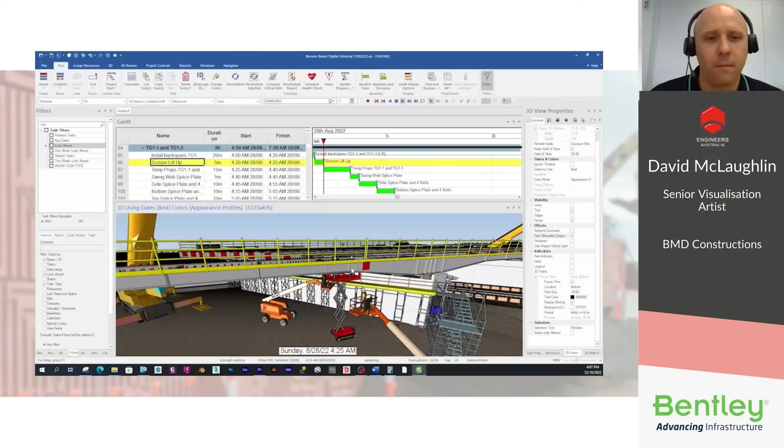So we're installing the main spans here, counterweights, and then we're installing the back spans as well. So, sorry, it's all sped up. Also, I'll send a link at the end for the full video through Vimeo.

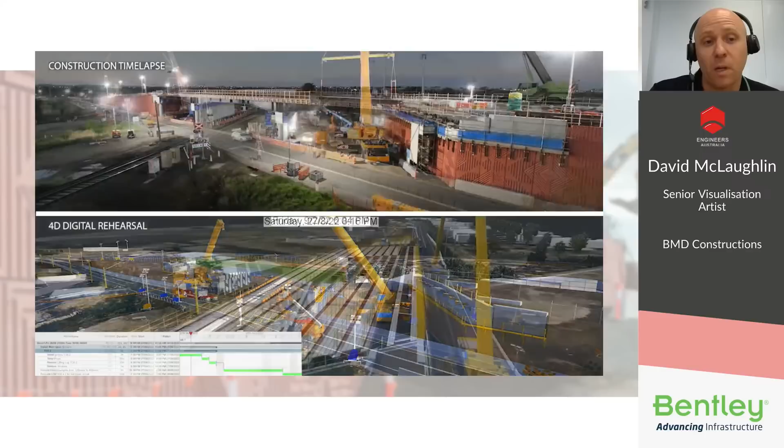What I like about this as well is through the 4D digital rehearsal we did in Synchro 4D, I was able to create a comparison between the 4D digital rehearsal and the actual construction. So I was able to get a time lapse from Glen Heston Photography, and they did a great job with that. They gave me the frame rate for each sequence of photographs, and I was able to match that in Synchro 4D and then create a comparison. I was quite surprised at how close, how exact we were with the 4D digital rehearsal compared to the actual construction.

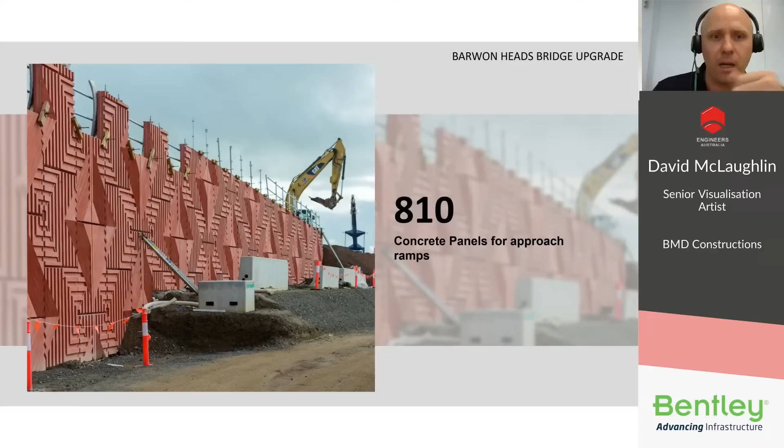So just to recap with the Barwon Heads Bridge upgrade, I'll show some of these images just to give you a sense of scope and scale of the project. We did 810 concrete panels for the approach ramps with this particular design. We built the abutments, the columns, and the blade walls to support the bridge.

It was about 750 ton total of steel beams ranging from 27 to 55 meters long. We transported those from Corio to Marshall, about a half an hour drive. Yeah, about 30 minutes in a car, so a little bit longer with a big transport on a truck.

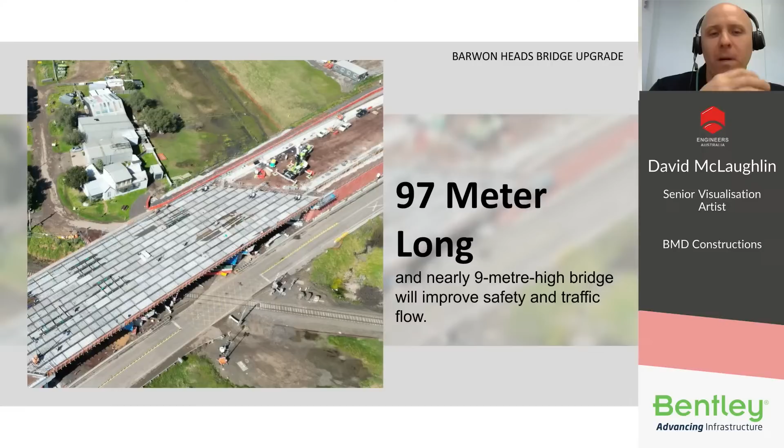And Clint, you can cut me off anytime and jump in if you want. You're doing very well, thank you. So all up, the bridge was about 97 meters long and nearly 9 meters high. This will improve the safety and the traffic flow in that area.

Okay, so I just wanted to do a bit of a time scale of how we implemented the 4D digital rehearsal and then how we presented it to the project team on site. And then we're able to do videos and show clients and major stakeholders at the end of it, before the bridge install in August and September.

So Peter Anusas, who was our general manager in Victoria, Southern region at the time, had a lot of experience with digital rehearsals in the United Kingdom before through previous companies. He came to me with this project. I thought it was a great project to use Synchro 4D and utilize not just what I've been doing, which is 3D visualizations, but adding that 4D element with the schedule and the program.

So all the 3D models are linked to that 4D schedule in Synchro 4D, and then presented through a sequence of 15-minute activities. So it wasn't just hour-long activities, we actually went down to the 15-minute activities.

So that was the beginning of June. At that time, the abutment and approach ramps were ongoing. I would say it's probably 80% complete, I think, Clint. That's correct, at that time. Yeah, that's about right, it was about 80% complete at that stage.

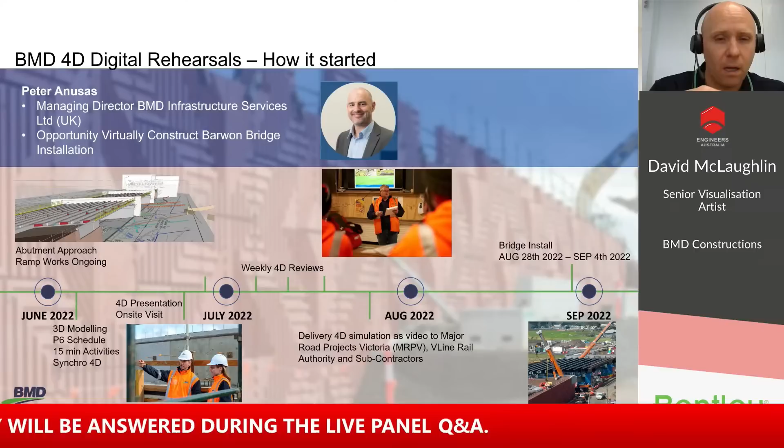There's a bit of a gap there between August and September. I guess the planning phase was done. What happened in that month, Clint?

A lot of consultation, taking what we'd created as our digital rehearsal right down to local fire brigade and ambulance emergency services on how they could actually access the site, explaining what the site could look like at different phases. If they were required, how they would get an ambulance to the site, how we would be preparing stretchers if someone needed to be evacuated. It allowed us to communicate with a high degree of accuracy what it would actually look like, because technical drawings are sometimes difficult to communicate to people who might not be in the infrastructure and engineering space.

I'll move on since we've only got a limited amount of time. We'll discuss some of the 4D challenges we had.

As I show some of these images, we'll go into the methodology, especially the splice plates. On the main spans we were provided with 2D drawings for splice plates. They were attached to the main spans, then swung into place and bolted to the back spans, the smaller girders. My challenge was I was given 2D hand-drawn plans and had to put them into 3D.

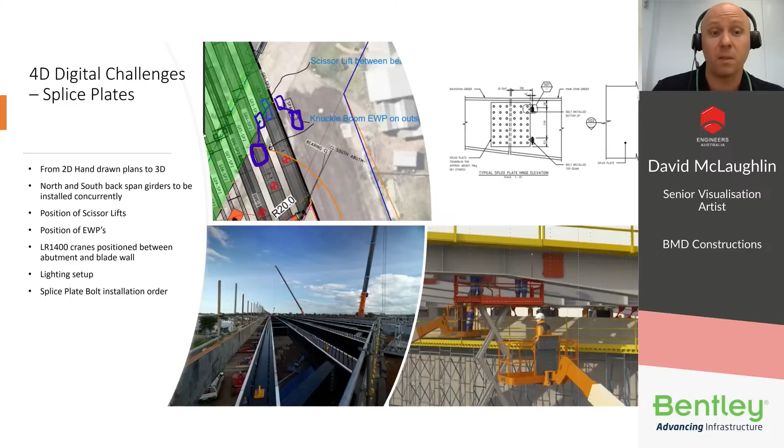We also had two LR 1400 cranes positioned between the abutment and the blade wall, so I had to make sure those positions were correct. The lighting setup was for night work, so we had to make sure the lighting was in the right spot. Then we went through the methodology of the actual splice plate being bolted and the installation order.

So I've prepared a video for this. I think I'll just play this part of it.

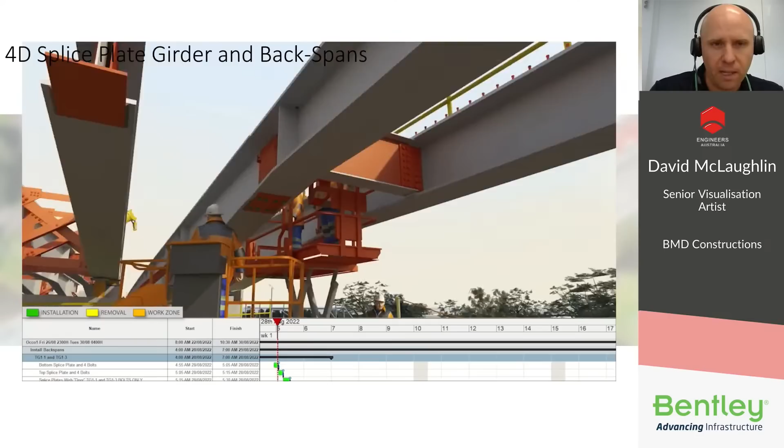These are the two back spans getting installed. You can see the swinging of the splice plate and the attachment of just four bolts, not all the bolts, then the top plate and bottom plate getting installed. I can't go back on the video, unfortunately, but you could see I've also put a landing plate onto the main girders. When the back span comes down, it gets placed onto that landing plate. The model doesn't really show it well, it's just repeating there, but there's a bit of a weld around that landing plate as well.

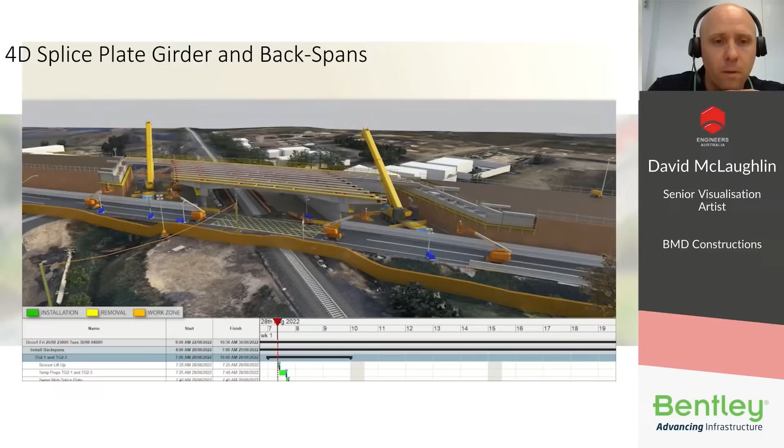So is that correct, Clint? Yeah, 100%. And the detail that we could go into gave us certainty around timing.

Literally timing down to the 15 minutes, but we also modeled it and could talk through with the fitters if they thought that was realistic. It also allowed us to communicate the sequence that the bolting had to be done, and the installation of the plates, because some of the plates we found out could clash and you wouldn't be able to tighten them if you put them in a different order.

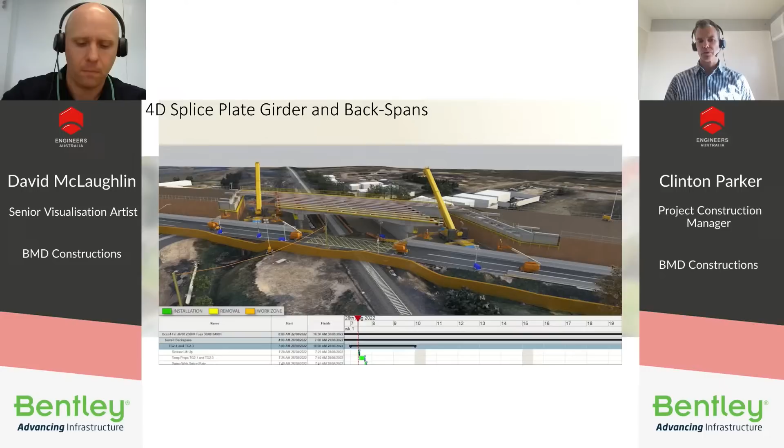So that's the sort of thing we would have not been able to do without these rehearsals. So I'll just play that as well.

Okay, so another issue was the concrete transfloors. Well, it wasn't really an issue, it was something that you guys had developed. You'd never developed this before, like handrails on the concrete transfloors.

We had a quite a good idea. It's probably not necessarily an innovation or something fully new, but we hadn't used it in this application.

So it worked really well in someone's head, and we could get some shop drawings drawn up, but we couldn't fully see how the workflow would work, and we didn't want to leave it to the night of the race because it's very hard to troubleshoot on the fly. So that's what the 4D animations allowed us to do - we were able to model it and then see if it would work and tweak it, which was massively useful in our planning process.

Yeah, that's right. So I've also prepared another video for this, just to show the transfloors being installed.

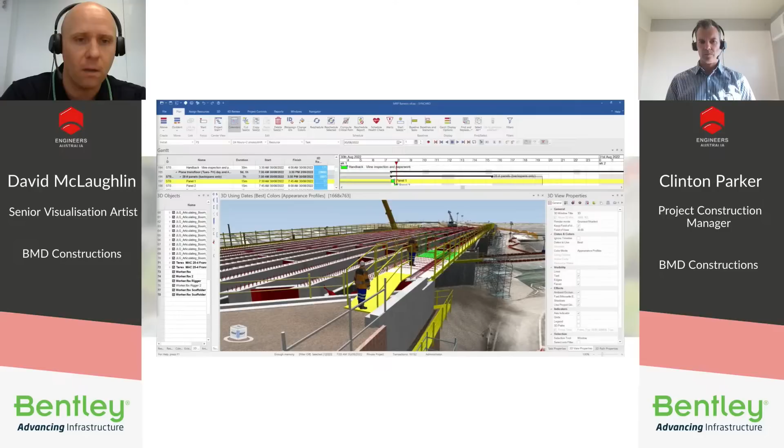Also, we discovered an issue between the abutment and the transfloors and the spans - there was actually a gap there. So there was a bit of a safety issue getting the crew onto those spans. This is where we modeled, as you can see in this image, the crew and a bit of a ramp that we had to install as well. That was discovered while we were doing the 4D rehearsals.

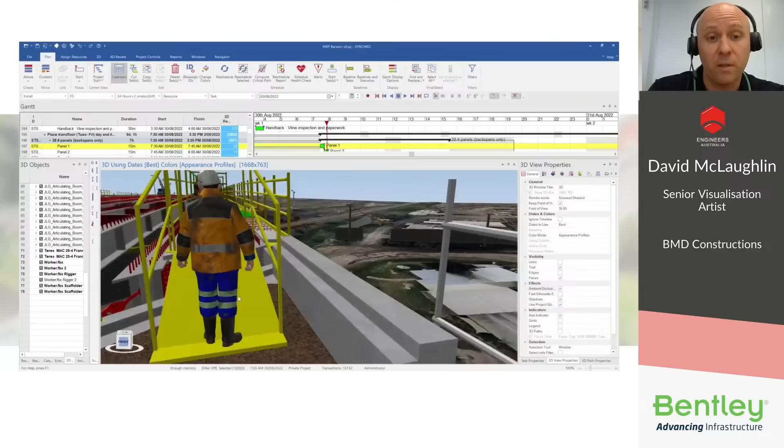I've just taped this on OBS, I think. So this is actually Synchro, and this is the level of detail we could go into all our reviews with. You can see it scrolling around in real time and watching the transfloors get installed. It was really important - the order of the transfloors as well - because of the rail shutdown.

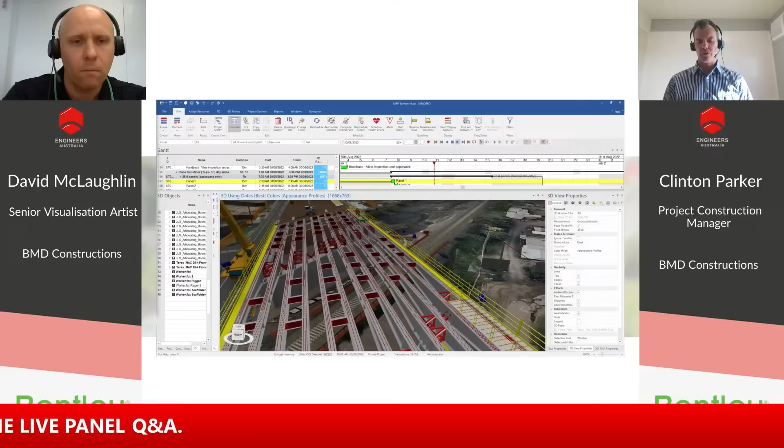We were able to install while the rail was live during these first installs during the week, and then shut down the second week to install the central transfloors. You can see the two teams. We had some restrictions - working outside of the occupation, we were working around a live rail corridor, which meant we could install them in a certain way, but only up to a certain point, and then wait for the shutdown before we installed the remainder.

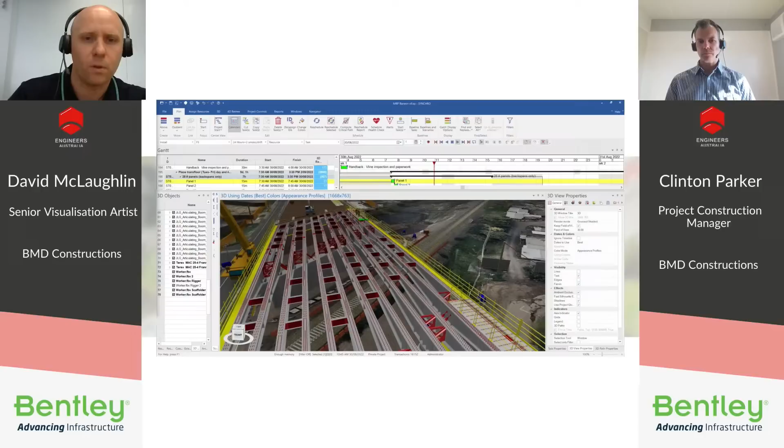So actually, I'll just go back. If I can go next again. There we go. I just wanted to show this gap because I zoomed in between the girder and the abutment, so we had to build a platform there. We also modeled the cross bracing as well.

There's so much more detail, but unfortunately we're just limited for time, so we can't show everything. You can see we've gone to that minute detail of bolts and screws, and you can see the scaffolding as well - the entry of the scaffolding onto the piers. We went to that level of detail.

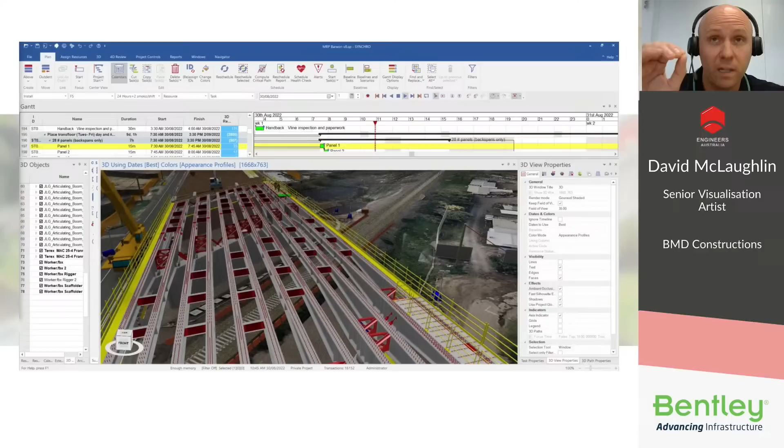We were able to provide this file. I didn't have Synchro Control set up at this stage, which is the iModel where everyone can go onto the web and view it. I provided the file, and our engineers could go into Synchro Open Viewer, which is exactly what you're seeing here. They couldn't manipulate the model, but they could scrub the timeline, see when it's been installed, view it in 3D, and take screenshots and measurements - all sorts of things. So that was really, really cool.

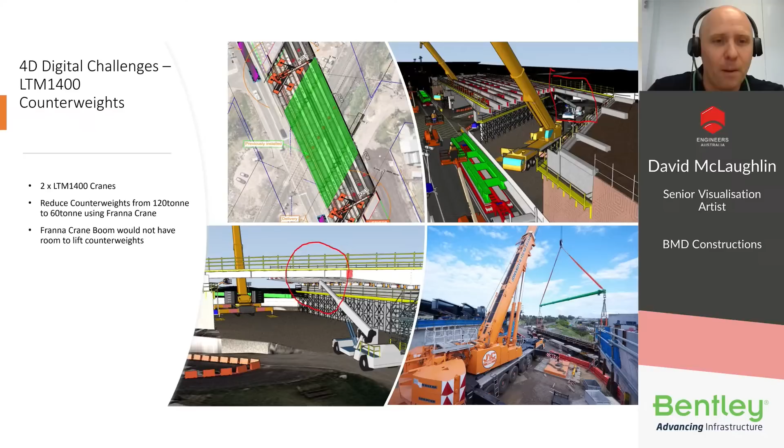I think we're going over time here, so I'll just go next. There's a number of issues with counterweights, how we were going to reduce the counterweights, and the positioning of the Franna crane.

I'll just move over to lighting designs. A lot of the night works, I was able to implement where the lighting would go. We did find a clash with one of the lighting fixtures on the abutments, and we were able to move that as well.

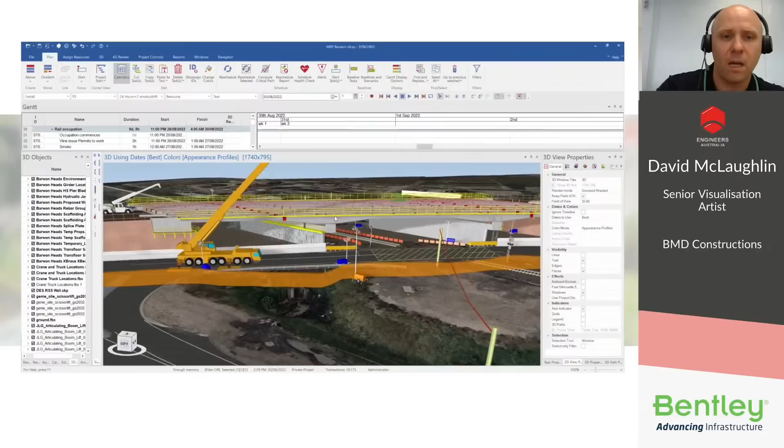I'll just move on quickly. I'm showing a video of the lighting design here, and where the transfloors were going to be positioned and ready to be installed. We have 2 cranes as well during the shutdown for the last backspans.

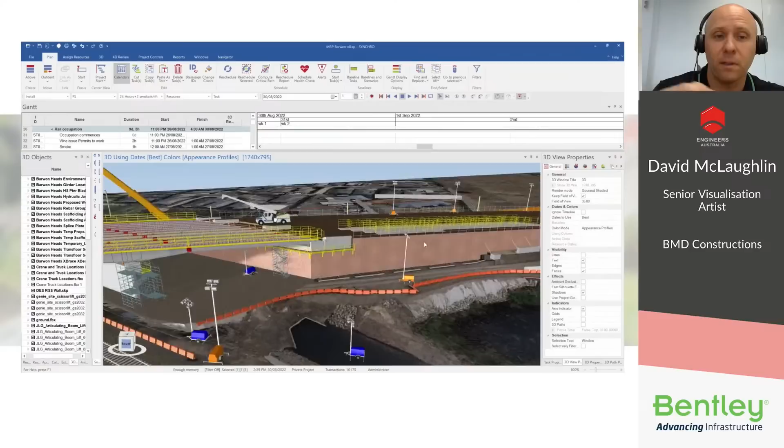Just a huge amount of detail, which is really cool, and you can fly through in 3D. I'm using an HP notebook for this project to view this, so it wasn't a huge computer. I was able to reduce a lot of the 3D geometry as well, but that's a whole different webinar to discuss the 4D implementation.

Some of the 3D programs I used: SketchUp, 3ds Max, and AgTek, which is our earthwork quantities program, but I find it a very fast string modeling program. Most of the models were done in SketchUp though, and then imported into Synchro.

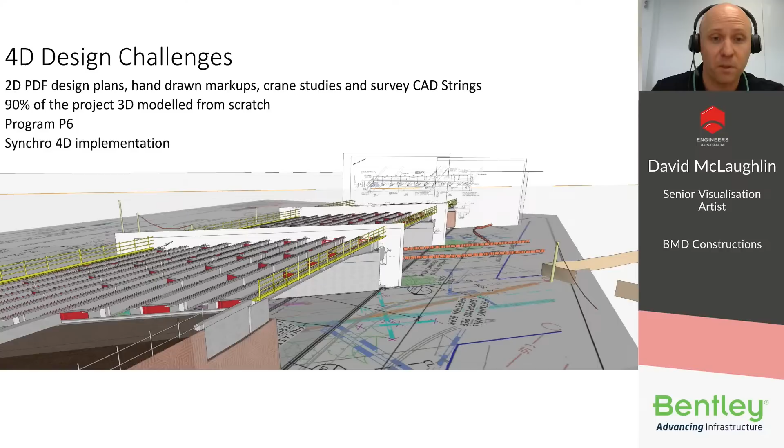Some of the 4D challenges included 2D PDF plans that I modeled from scratch, and that's just a picture of how I set up all the models in SketchUp.

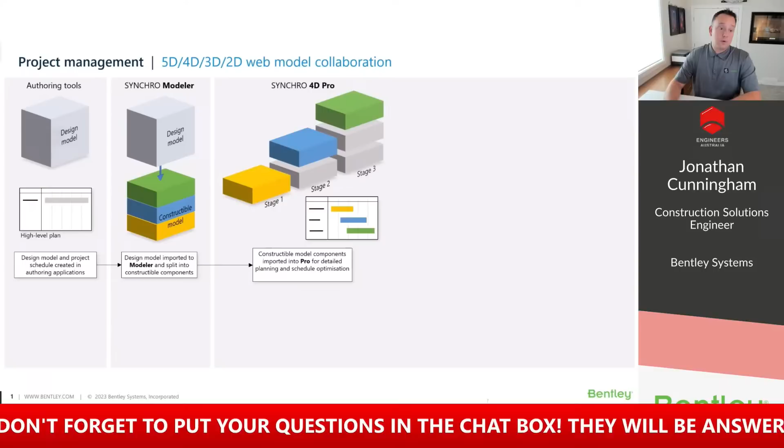Synchro 4D Pro is next. We take those newly constructed components that were made in the constructible model. We bring that over to Synchro 4D Pro, and it allows us to sequence those new constructible model components. So bring it into 4D Pro, bring your schedule in, and get those multiple staged, sequenced 4D elements within Synchro 4D Pro.

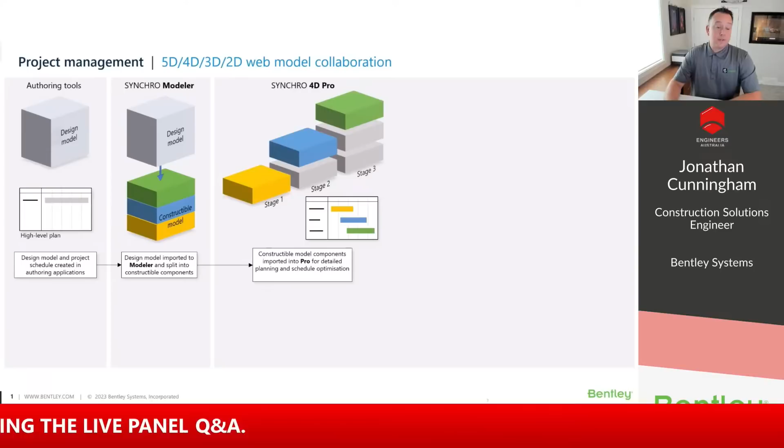Next portion of it is Synchro Control. So current model and schedule, we bring that into Synchro Control for the constructible model and that detailed schedule. We made it available to the team in control for collaboration, communication. Verified information on site is synchronized to the field. The reason we do that is so we have that full degree of transparency of how the project's going to be executed in a specific sequence.

Based on how we've laid that out in the initial project initiation phase.

Synchro Perform and Synchro Field. Field users can view that constructible model and schedule and report on the actual progress in real time, so that's model-based statusing, as well as within Synchro Perform, you can do that progressing at the activity level and task level based on quantity unit of measurements and cost allocation based on that activity.

Real-time statusing and reporting using the 4D model, as well as Synchro Perform, gives that live update and progress from the field to the office.

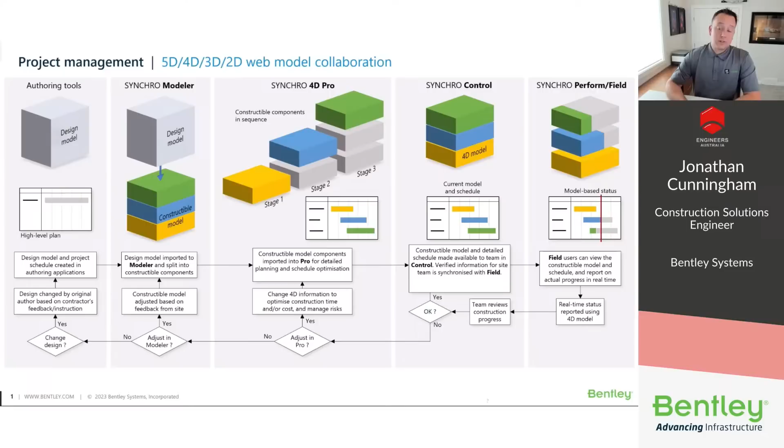Once that feedback has been made, do we actually need a design change if it can't be adjusted in Synchro Modeler? A design change is initiated, and then feedback from the construction site shows how potentially that design could be changed to more optimized construction for the project itself.

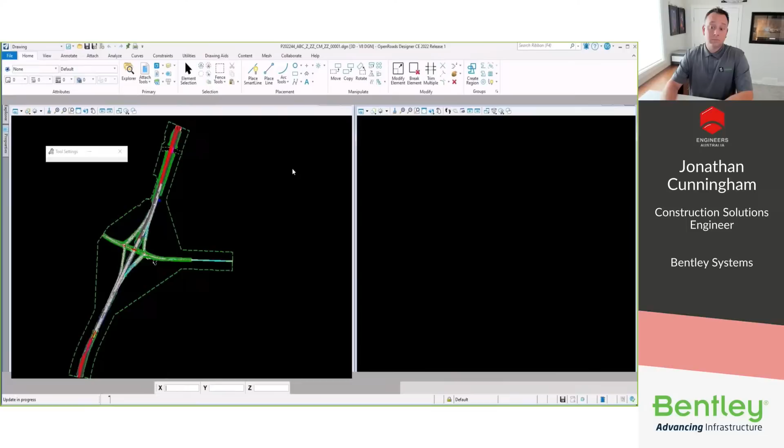So we can see we've got two different views within the design screen.

We're going to go into our saved view within the project. These saved views are communicated across the whole platform itself, so you can view what's in OpenRoads Designer, what's in Synchro, and what's in ProjectWise, because it's a federated, connected iModel within the platform itself.

In this case, we're going to be managing an issue across the platform. So an RFI in this case, we're going to select the one that's already created. You see some details, attachments, some documents, comments, audit trail, and related information.

So we do have an existing markup. We can download that file and see that existing markup that came from the field. And we've got a note, bridge footing and storm sewer location, request for information on that, and check for any existing documents. We can link documents from our ProjectWise folder or share within our project itself, or the design of the ProjectWise DI.

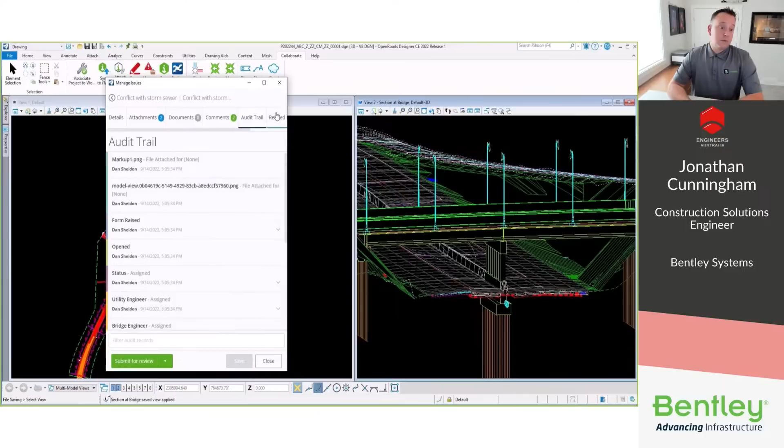We can view the comments. Those comments will be translated across the whole platform itself. So a comment posted in OpenRoads Designer or ProjectWise will be communicated in the Synchro platform as well. You have an audit trail, so you can see different audits along the way, from raised to open to status to specific markups or images taken, and then it was from a related issue that was originally created and escalated into an RFI.

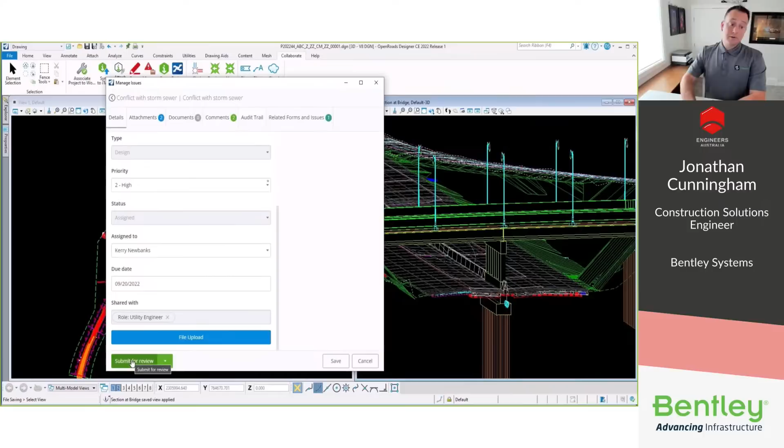We're going to select the specific person it's assigned to on the project. We're going to share it with a utility role. We're going to give a comment because we're moving it from a specific state, from assigned to in review. In this case, we'll give a comment to Kerry about the storm sewer and a conflict, and then submit it for review. You can see that's been successfully saved.

So back to our Synchro view. In Synchro, we're showing that same form, that same RFI that was created. You can see the new assignee, Kerry, has been assigned to it. It's in review. You can see the markups, the new comments made by Don, and the audit trail information that you saw in OpenRoads Designer.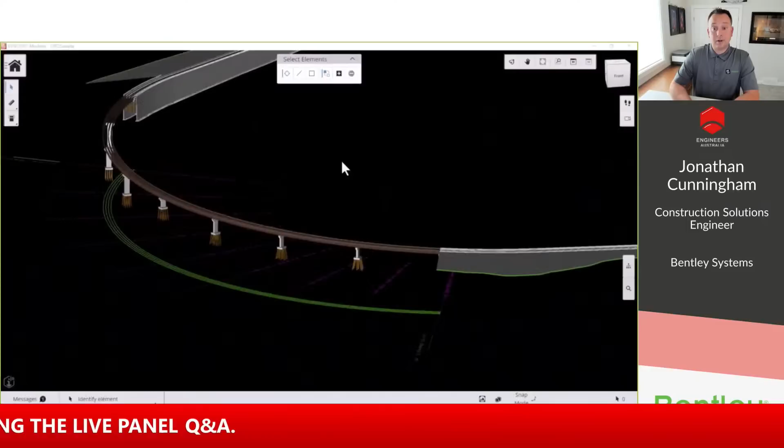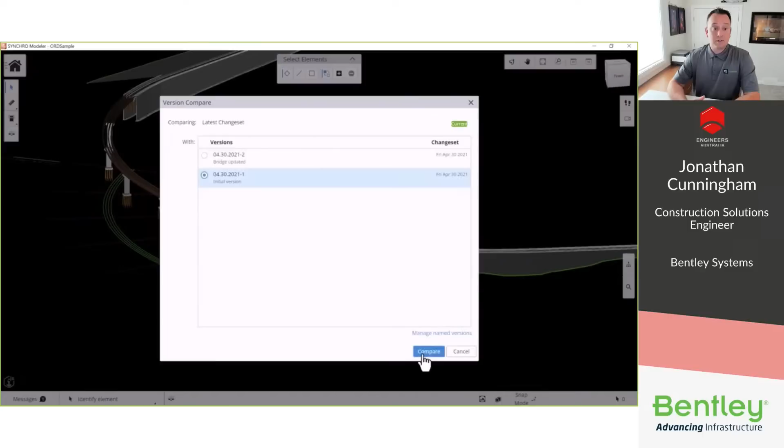So right now we're going to go to SYNCHRO Modeler, that's our quantify, quantity takeoff tool, where you can assign cost codes and do quantity takeoff. First, I'm going to show design change management, where you can compare two different versions from one to the other. The reason for that would be if you're making modeling splits from one version to the next, you want to be able to compare how those changes have affected the new design model itself.

So we're loading the model itself. You can see we've got three different color statuses: new, modified, review, and then you can toggle that on and off, or toggle it on based on only the assigned and sliced elements that were affected by that design change itself.

You can mark it as reviewed, the quantities and properties, or remove that specific element slice if it has been associated to that component itself. In this case, there's no assignments. We do have some properties for that tapered cap itself.

You can toggle on and off, show only changed properties within this view, and then mark it as reviewed itself. You can see that check mark, that one is specifically reviewed, or uncheck it as not reviewed to the system itself. That version compare button can be hit again, and you can see the current version and the target version being compared within the project.

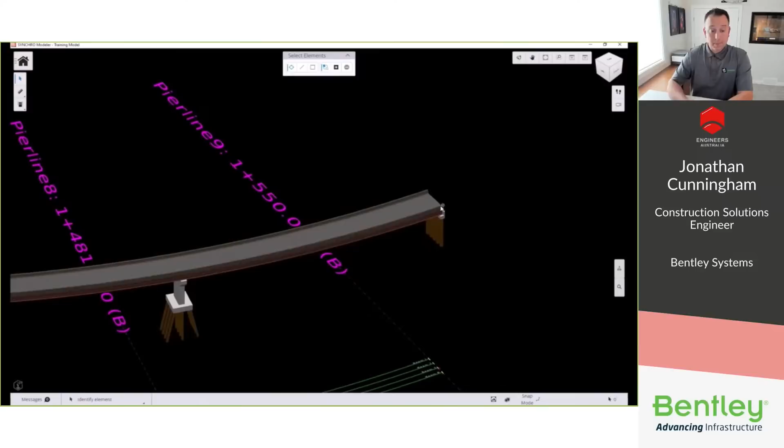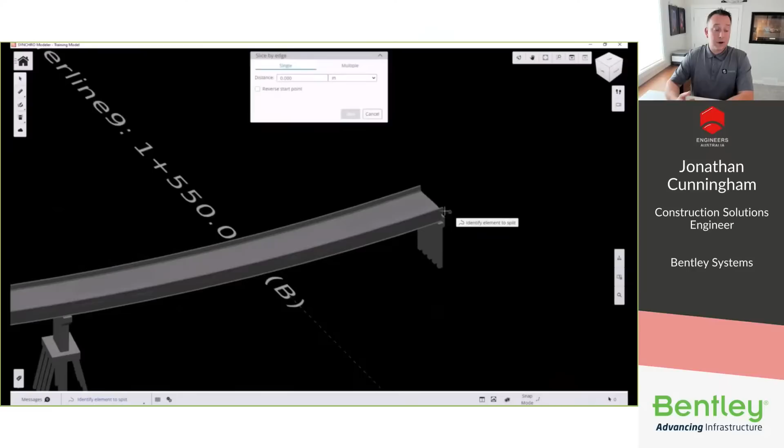Next we're going to review being able to do these quantity takeoffs in SYNCHRO Modeler, which we call slicing by edge. So we're going to review those properties. We'll go through this to show that as you slice an element to make it more compatible for construction sequencing, it can be done in different ways: by offset, by horizontal, vertical. In this case, we'll show you slicing by edge.

So we're going to select that barrier, and then we can scroll down that edge of that barrier and slice it by the edge itself. We can either key in that distance, do a multiple slice or a single slice, and key that information if you have a specific distance split on that specific section.

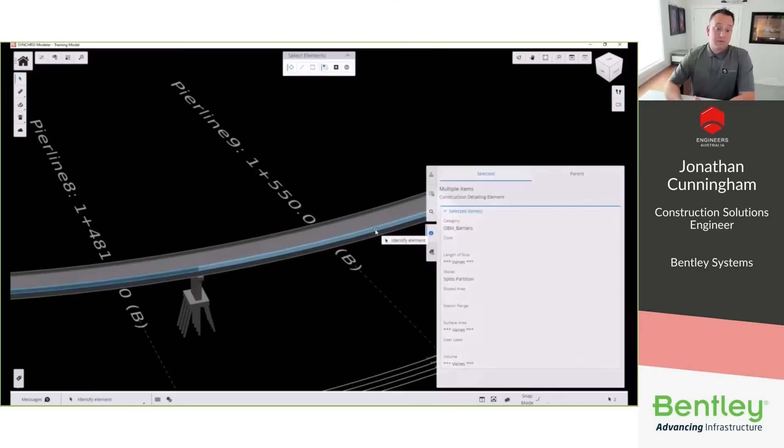You can see here we've done multiple slices, seven in total. So if you have an overall measurement, it will equally divide those by that amount, or you can start that split in the other direction by a reverse start point itself. You can see the new split, the new volume sliced on that edge, and you can see the actual parent to compare the two.

You can see that we've got a slice where it was originally a whole piece itself. So again, we can start that split again on the new edge based on that new selection. In this case, we're going to slice it multiple times, where before it was done in a singular fashion. So those new edges have been sliced based on the new quantities we selected within the quantity takeoff.

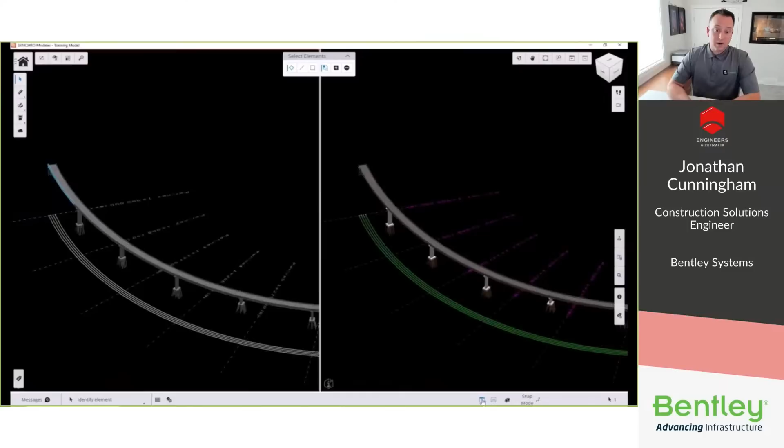You can compare the original versus the new version for sequencing. You can see that the original has the full portion of that barrier, while the new version is split multiple times. The last thing to do essentially would be to sync it back to the cloud and allow for that connectivity to be shared throughout everybody's iModel on the project.

So we're going to do a cost code assignment. The cost code assignment essentially allows you to assign cost codes per modeling element, and those are based on a formula for quantifiable quantity takeoff.

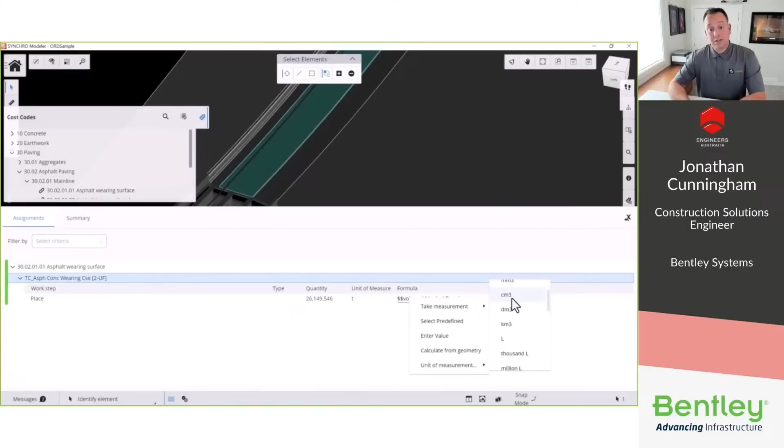So first we went through breaking those model elements into smaller manageable components. Now it's time to assign those quantifiable quantities so we can assign a cost to them. In this case, we've got a work step, a summary, and we get the actual quantity being taken off. We can take that measurement and change and modify those units as we see fit within the application.

Or you could do that in the bulk import when you first set up those cost codes within the project.

So in this project, we can see that we have a work area detailed of the surface area and a new volume based on the split. I showed that comparison before.

Now we're moving to Synchro 4D Pro to sequence those model elements in the project itself. So we move to that next stage where we can see those elements that have been split by location and break out for the project itself.

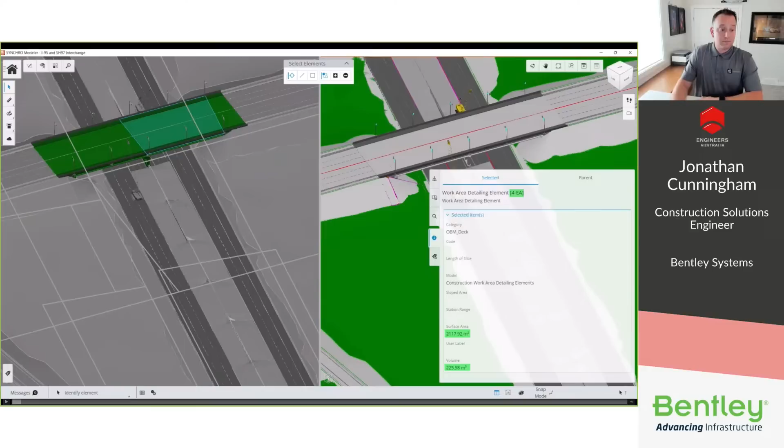You can see the work area detailing 4-EA, and that's the new bridge split that we put in there, that new surface area. We have a new work breakdown modeling tree, and those are based on splits that have been done in the model, which will show up in Synchro 4D Pro for further sequencing within the project itself.

So Synchro is highly interoperable, with different scheduling formats you can import within Synchro 4D Pro. P6 is typically the norm, but we do have a full CPM engine backing Synchro, so it can be done either through the database, full connection, or an import of a P6 XML file.

So for importing and exporting, we do have an option to import and export different file types. That gives that cloud connected connectivity within the project and gets that specific data into the project.

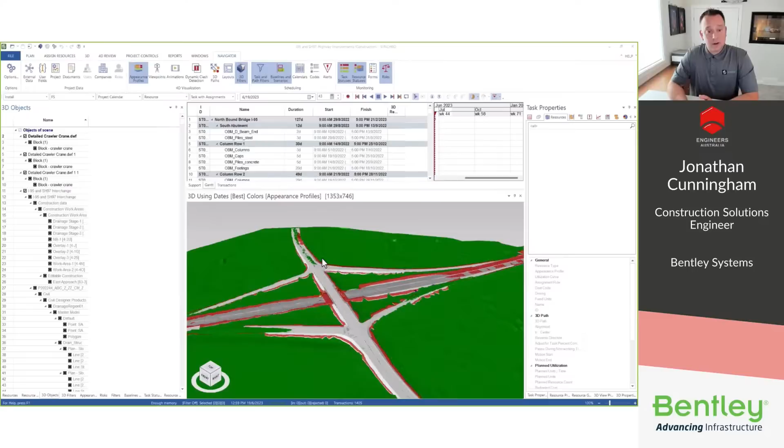So next I'm going to show connecting through Synchro Control. That cloud connected connectivity - we're going to connect to the project itself, connect, and that would give you the synchronization between the project and allow for multiple users to be working in the system at the same time.

So here I'm showing our resource types. That could be material, equipment, a human, or a location. And those resources are coupled to the schedule, which allows us to do that 4D sequencing in the project itself. So resources plus 3D model plus schedule equals 4D sequence model, which I'm showing the playback of now.

So an example is the bridge. You can see the bridge deck come in after the structural piles go in, and the barrier comes in, and then you can see various stages being completed based on the sequencing of the model.

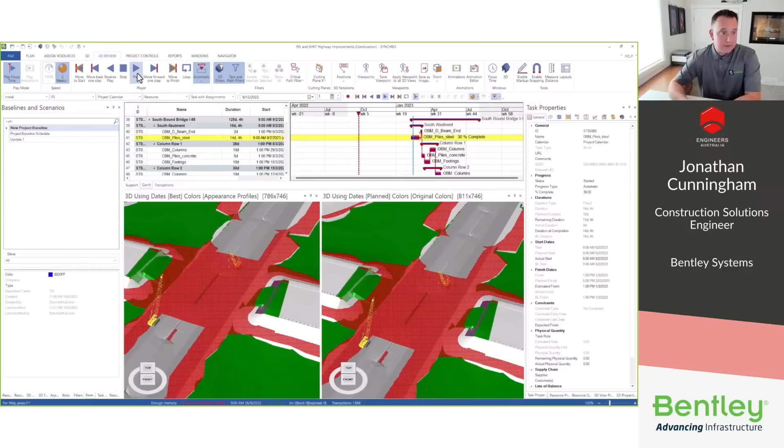So project baseline - you can do baselines in Synchro 4D Pro, comparing those two different versions of the project. So it could be that a key piece of equipment has come late.

So you want to compare those two different versions - if, in this case, for this bridge, a key piece of equipment comes late, how is that going to affect our overall scope, schedule, and cost of the project itself? So you can see the difference between the two views - one is slightly lagging behind. That could be done on any resource associated to any activity and task within the project, giving different scenarios that you will potentially have on your project.

Showing that baseline, this is our cost section. Various associated costs can be displayed in the Gantt display. You can see actual direct costs, which can be moved along our earned value analysis graph, illustrating earned value over time: PV, planned value, earned value, actual cost, and baseline costs.

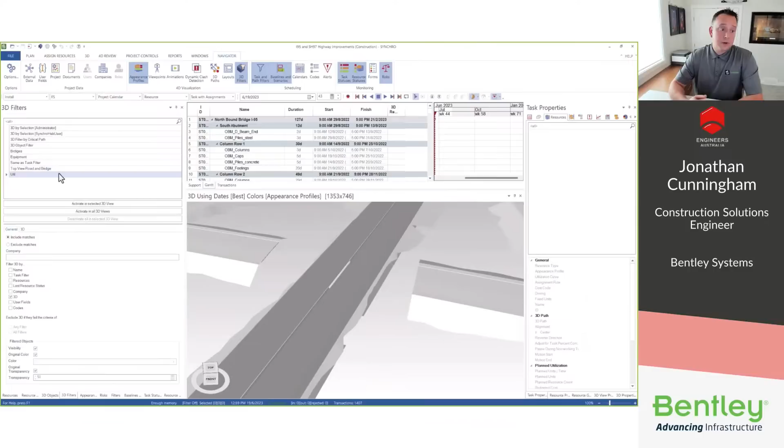Right now I'm showing 3D filters. In this case, we've got different 3D filters you can filter your project on: top of bridge deck, equipment, and it essentially allows for the flexibility to customize your display and planning options to suit your project needs.

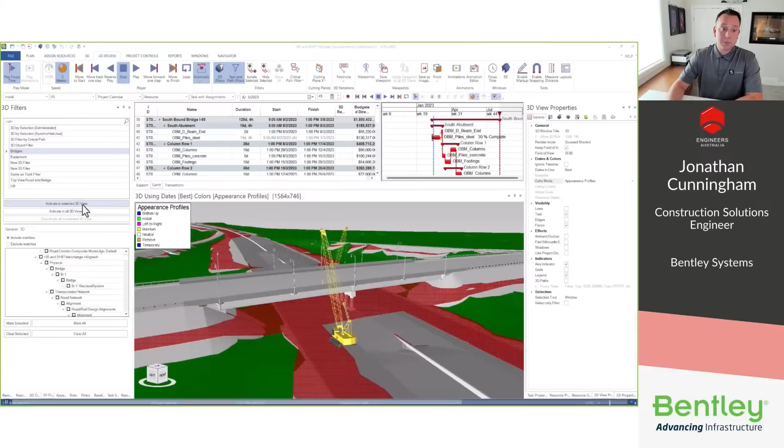Then I'm showing, again, those 3D filters. This is based on resource statusing, which allows you to essentially status any resource on the project. So resource status of concrete, steel, and colorize those into multiple states. Those states could be changed essentially by an outside source connecting to the API to toggle those specific elements into different states.

Right now I'm showing Synchro 4D forms, allowing for connectivity and collaboration through the project. You'll see these forms in a timeline based on the model location. All forms available in Synchro Control will be available in Synchro 4D Pro. So that RFI we viewed before is there in the system and viewable within Synchro 4D Pro for connectivity and collaboration—same files, same markup, same attachments, same comments, same audit trail, all available in all locations.

So we're communicating and collaborating within the project itself. It gives you that better overview.

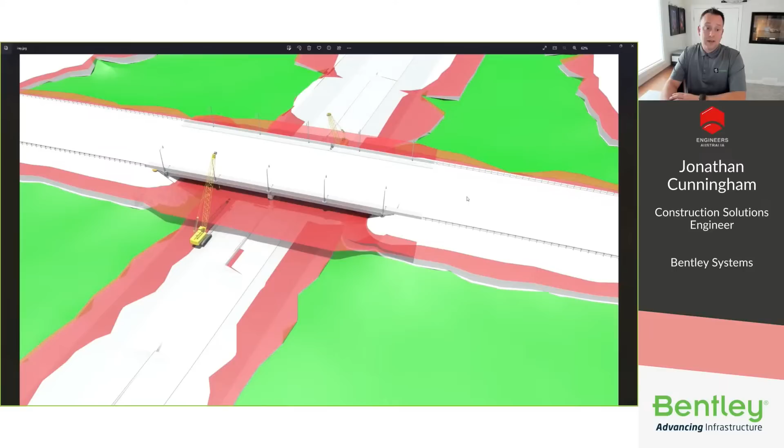Right now I'm showing a timeliner. Essentially, we have the option to create an animation, and you can do a detailed iRay rendering, and that could be done for your whole video. That's essentially built into the product, no extra cost. It gives that stakeholder review and assignment within the project itself.

Synchro Control homepage—manage communication effectively. You can see I'm pulling the project drop down, so from multiple projects you see that there. Project information with some weather information at top, my recent activity, my work, some quick grab forms that you can create, the iModel carousel, and the summary KPIs itself.

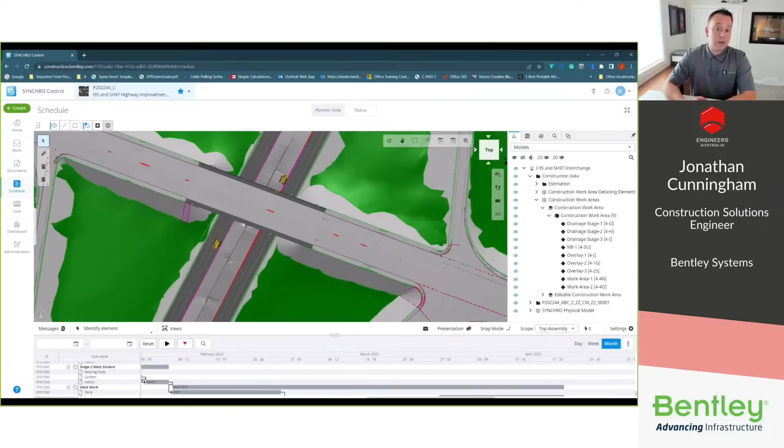Getting into that same 4D schedule that we emphasized why we're building it in Synchro Modeler, to Synchro 4D Pro authoring it, to now viewing it for connectivity and collaboration. I like to think of Synchro Control as the heart of Synchro, essentially, where that collaboration execution starts. That same 4D authored schedule can be played back within the web, the field—and we'll show the field here shortly. So those same columns and bridge deck appear, steel coming in, with lampposts and concrete being poured on specific sections, all viewable within that 4D schedule tab and window.

You can also focus on a specific time. So I've focused on the month of February here to get a view of specifically what's happening in that month. You can see it in the schedule.

You can also filter and search based on criteria. So I'm going to key in some information on the south, and that would be what it's found, south information.

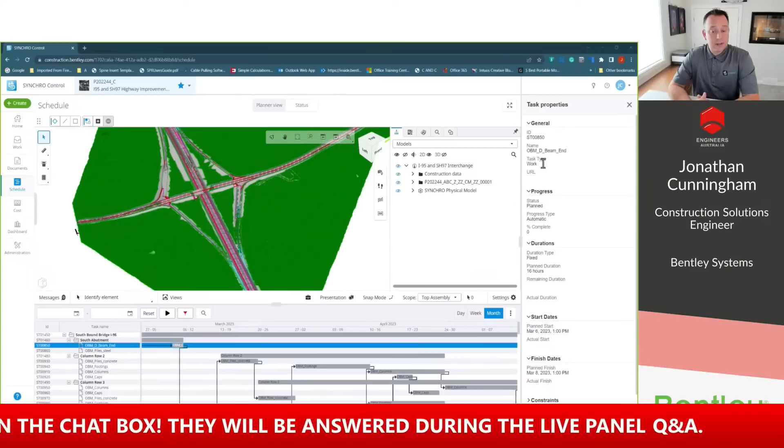You can also select on a specific activity, same as you would see in Synchro 4D Pro, to get that general information: the progress, the durations, start dates, finish dates, constraints, and physical quantities if they have been so assigned within Synchro 4D Pro.

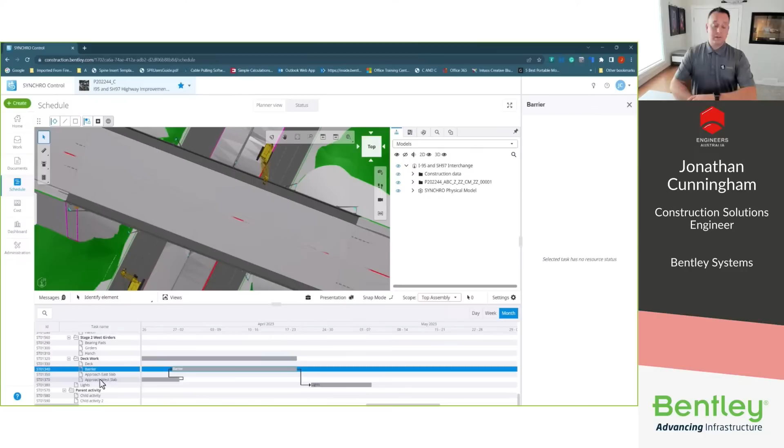That same schedule with all its milestones essentially built into that web-based view for viewing and collaboration purposes. And that's where you're able to submit a specific form, whether it's an issue or an RFI, against those schedule components. So I'm selecting a status of a specific component.

These are those resource statuses we talked about. You can view those within the web. So I selected the deck—it's in a specific state of curing.

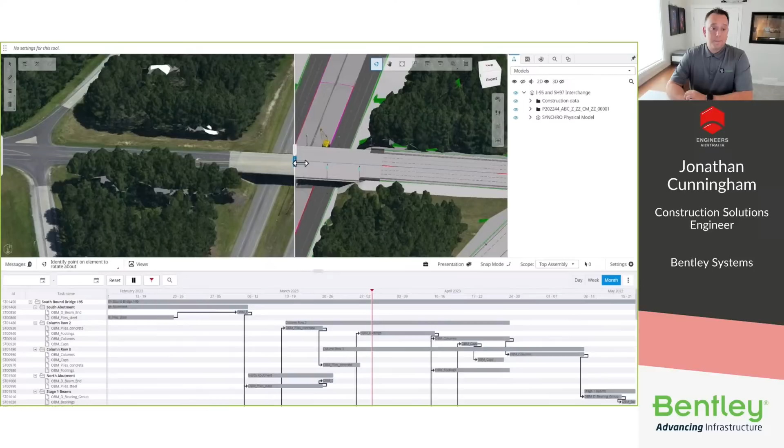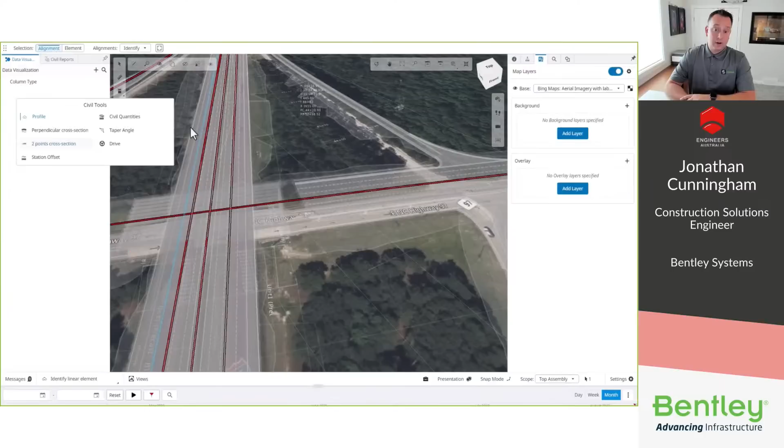We also have the ability to bring in reality models. So I'm showing the difference between a cutoff view between the reality model and the plan model, and then essentially playing that back in that web view based on the reality model you've selected. And that's all connected through ProjectWise Context Share service within Bentley, giving that another layer of rich scheduling information, actual versus planned, to see if you're actually on track on your project itself—more collaboration, communication, the full scope of what's actually happening.

So Bentley Civil tools are available in the field and the web. You can see I'm selecting a specific profile if it's available on the project. That profile will come up in the bottom view, and you can scan from left to right.

We do have different types of tools: the civil tools, the profile, perpendicular cross-section, 2-point, station offset. We can also select civil quantities, taper angle, and then we also have a drive mode, which is a new functionality that just came out shortly.

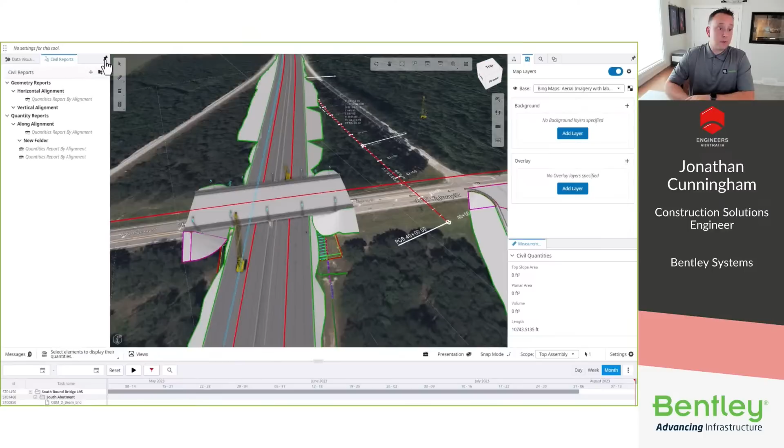I'm going to show you how to grab a civil quantity here. All these panes are resizable within the web type view, so when you save and come back, these panes will be up. These are quantity reports by alignment. I'm going to run this specific report.

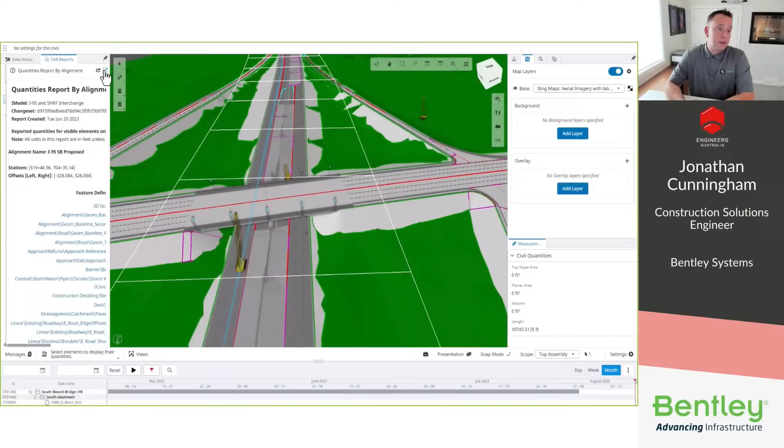We do have a few options: zoom to, delete, cut, and rename. Let's view that report. It comes up in the left pane here, and we can also open an additional window to view that quantity information by alignment. Quite a bit of information there.

We can also export it and download that report through Excel. It gives that information in a kind of spreadsheet layout, organized to how you see it.

We're going to get into the My Work tab. As it states, My Work - I am a specific persona-based user within the system. I have work assigned to me, in this case a sample inspection. You can see the PDF plan set on the map itself, which will show the inspection assigned and how many days it's overdue.

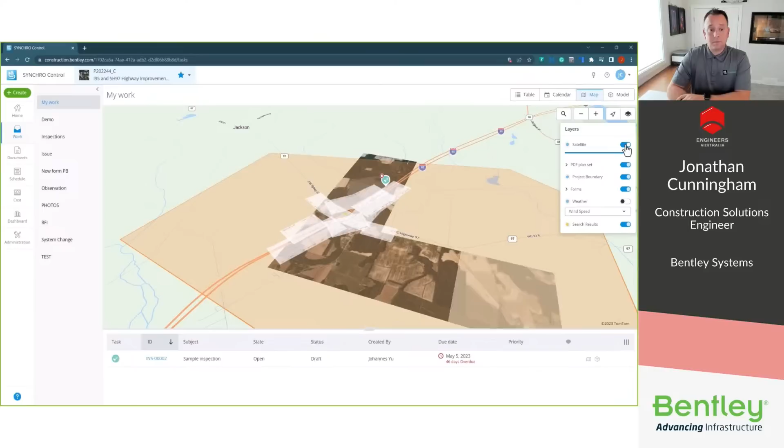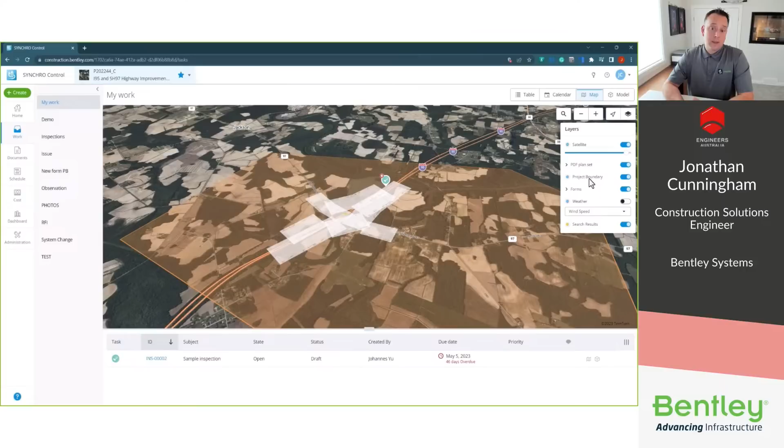We also have different layer options, so we can bring up the satellite view and toggle that on and off depending on your needs. You can set the opacity. We also have the PDF plan set, and we'll get into this a little later, but you can see different levels of the PDF plan set for this project. The project boundary is the orange boundary set initially when the project started, along with specific forms. We also have a weather option for wind speed and associated planning within the project to get a better overview.

We have 4 different types of views: table, calendar, map, and model. The table view shows the table, the filterable calendar view shows that calendar type view, the map shows the map geolocated, and the model view shows that specific model within the project.

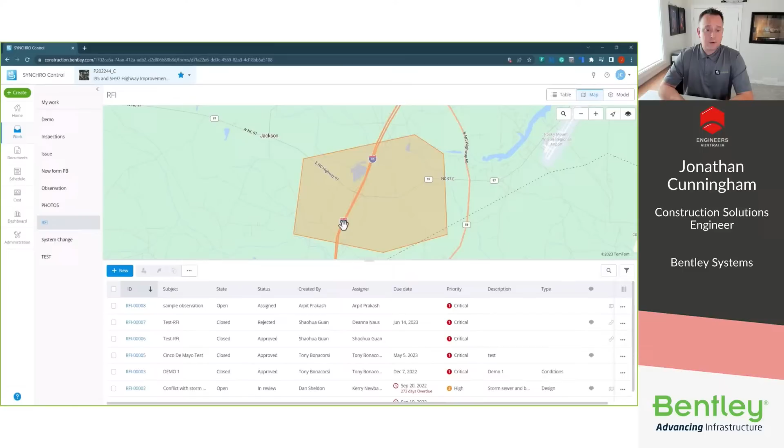So you want to show that RFI again that we've been talking about for the sewer. We'll zoom in - we've got 3 that are still outstanding. Go to the specific one - it's 273 days overdue. But that just basically gives you how many days potentially it could be overdue.

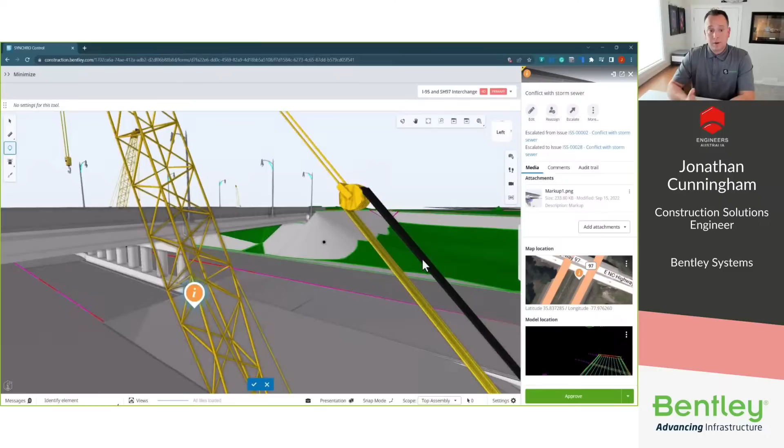We see that geolocated map location, longitude, latitude, as well as that model-based location assigned within the project. We can manipulate the map to see where it's placed. This also gives you the flexibility to zoom in, interrogate, view that information, view the audit trail, see what it was escalated from, and give that description if needed to move further ahead on that review process of that model.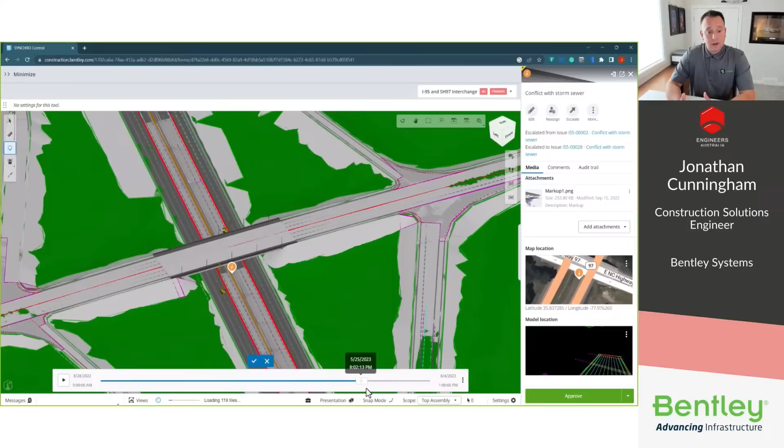So all our forms within the model type viewer, the model viewer within Synchro Control, have a timeline functionality. Time is quite important to us and our users, we believe. When did that RFI happen? Did it happen at the beginning of the project, at the end of the project, giving that kind of detailed view.

This is the documents section, where you can show different documents within that documents tab. This is our connection to ProjectWise. We have multiple types of options to open it in ProjectWise Explorer, get the link, create the rendition, check it out - that is the view I'm showing here. This essentially gives greater flexibility to users that have that connection to ProjectWise and have that full ProjectWise essential workflow in the system itself.

This is the PDF plan set - you did see that briefly, I showed it before. So this is the administration type view. You can see all the plan sets in a table type view: open model, edit the details, download it, review the revision, see if there's any issues and comments.

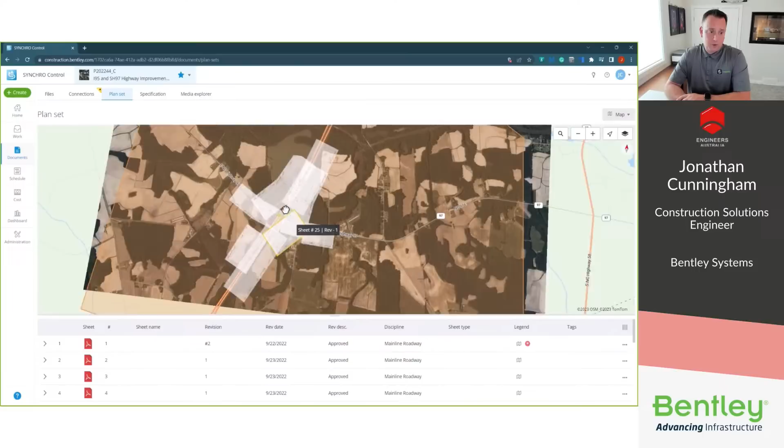You can see that little red flag on the legend. I can actually open them in the map - you can see them load up here. From that map view, you can toggle that on, view it again, and then essentially turn them on and off based on their opacity, depending on if you're in the satellite view, or go to that specific revision and sheet within the model.

So rotating the map, toggling the satellite view on and off, we see that issue, and then go to that specific issue if need be to see what is going on with that specific sheet in the plan set itself - giving you that functionality to essentially manage those within the project. So I'm going to view this on a single sheet, so we can do that PDF markup directly in Synchro.

So we can see the sheet information, as well as if this did have a different revision on it, we'd be able to compare the two sheets based on the changes. We can view it, annotate it, and add specific shapes for the markup functionality. I can insert an object as well as measure. The little flag shows the issue if there is one on that specific drawing.

Getting into the dashboard section, we can view our dashboards. All information that's aggregated through our forms is available within that dashboard. It's categorized as construction office, construction field, as well as inspections, and gives quick stats and KPIs for that viewing and aggregating purpose, to view your information in a consolidated view of the project. This can be exported out in Excel and PDF format, so users can use it in different formats.

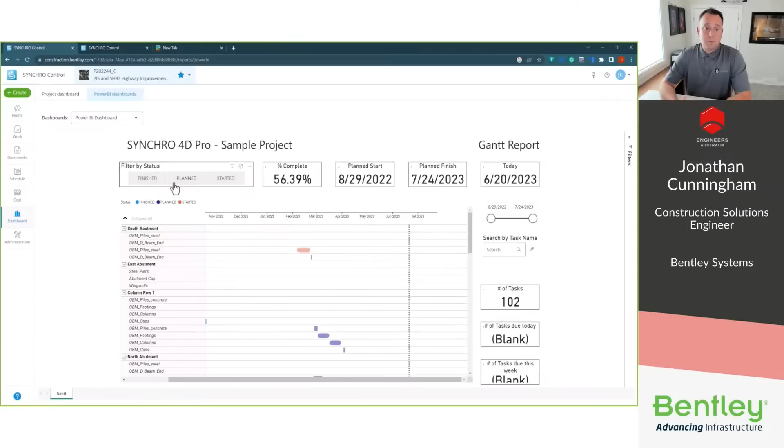You can also see we have a Power BI dashboard available, and we can bring in Power BI dashboards. In this case, an example would be our Synchro 4D Pro sample schedule project that comes with the software. We can manipulate the dashboard based on information coming from the field that's been progressed, based on date and time. Users can also modify this dashboard if they need more information, less information, or essentially design their own and bring it into Synchro Control as the CDE within their project.

Synchro Perform allows for effective project management, addressing several key components, including earned value management and performance management, resource management, subcontractor dockets, and event management. Project managers can use these tools and strategies to ensure their team stays on track and meets all project goals and objectives.

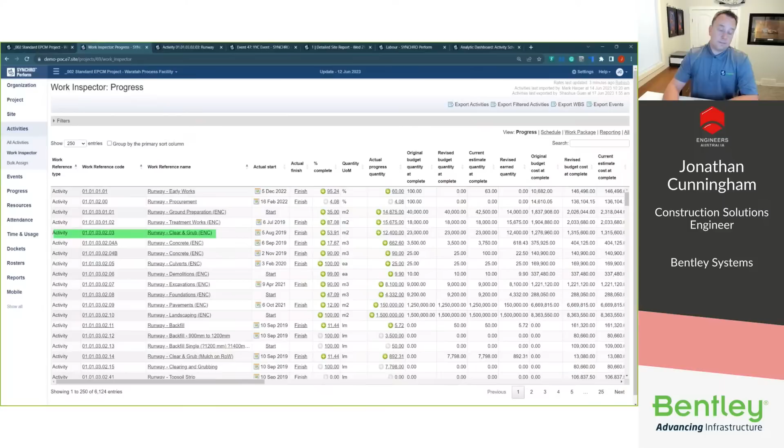Within the activity, we have several tabs: related events, progress, usage summary, and detailed reports. There's some owner information, subcontractor information, who it would be shared with, and comment information where you can comment on specific activities. There's a timeline showing events and activities within this activity itself.

We have some progress information, earned value method, and quantity unit of measurement, with some cost allocation data here as well, some categories, current plan dates, revised plan dates, and then our original plan dates brought into the schedule.

We have the earned value analysis. All these numbers add up to our cost performance index as well as our schedule performance index for that specific activity. Then we have a summary of costs associated with the specific activity.

So we're going to do some progress here, entering progress from the web. You can see all the progress that has been entered over time. We're going to enter our quantity delta value, which will update those other existing absolute fields. You can see all the entries over time here.

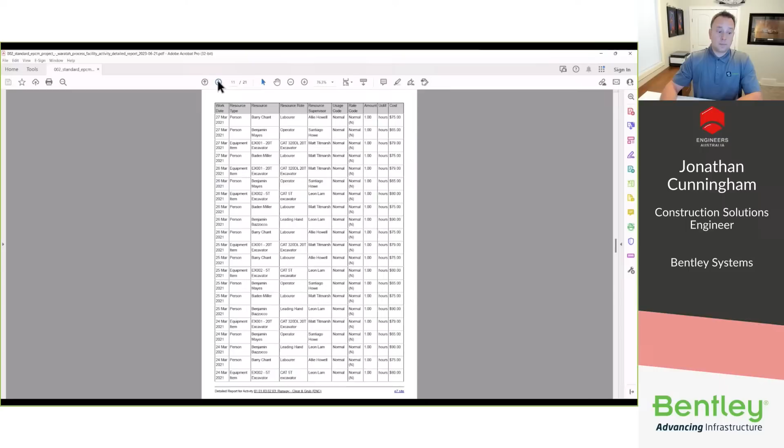This is helpful when you're really trying to break down the numbers and what's happening in that specific activity. So the related events, in this case, it's a YIC event. This one's closed in this case. But events are anything that are unplanned occurrences on a project that can affect your scope, schedule, and cost. These are associated with the activities. They look very similar to the activity itself, giving cost allocation and details, and essentially will affect the overall scope and schedule of the actual activity itself.

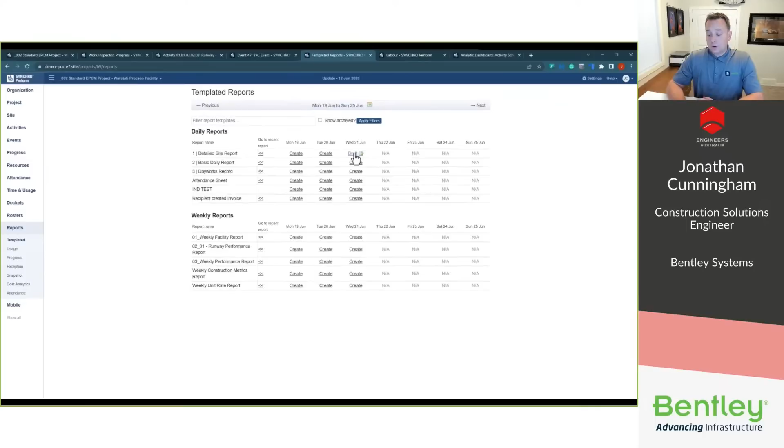It's good to track them, whether they're non-related to cost, but just in general. These are templated reports. Those can be run on a daily, weekly basis, all kind of part of the system itself. Dive into those specific reports at specific times in the day, get those reports, submit them, and essentially get them signed off to benchmark when it was run on the specific part of the day to get that detailed information in the project.

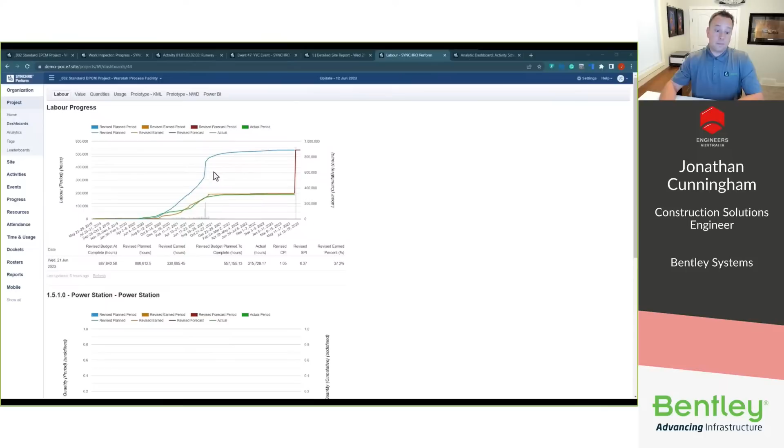These are our dashboards. So example of the labor progress, shows that revised scheduled performance index cost.

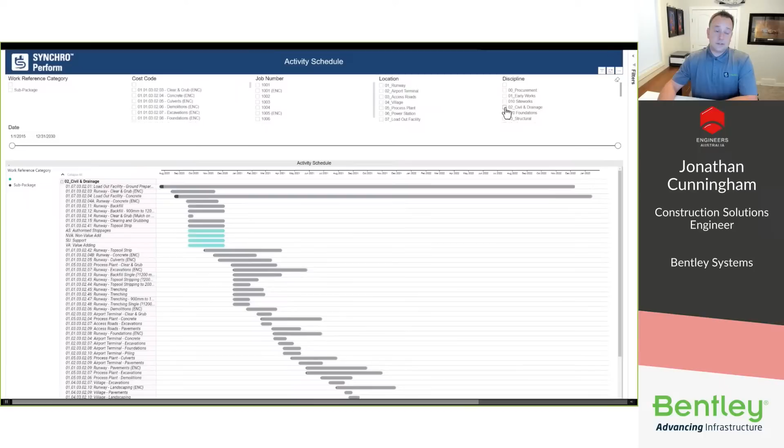This is our analytics page, so that Power BI reports that are part of the project as well. You can bring them into the system and concatenate the information how you would like to see it, if you need more flexibility in your reporting, and really drill down to specific disciplines that may be having trouble or not meeting their cost allocation on the project.

This is Synchro Perform mobile application, so I'm just going to quickly go through the example of the mobile app, iOS or Android capable. We do have activities, events, progress, times and usage, dockets, all what you saw on the web, but in a mobile format. I'm going to search through that activity list, find that same activity we saw before.

We're going to have a look at the same information you saw from the web, but in the mobile format. There's a page list, start dates, finish dates, related events. We can see the overall quantity and past entries on this activity itself, and when those specific comments were made on that specific activity.

We're going to get some progress entry. We can see the totals currently and percentage it's at. Just like the web, we can enter a value, either do the start change, end change, and then submit into the system.

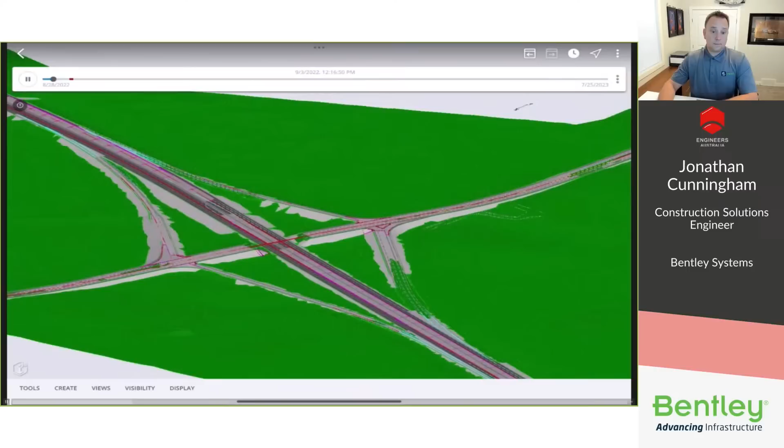I'm going to open up the model here. As you've seen before, that same 4D aspect you saw in Synchro 4D Pro and Synchro Control for communication collaboration is seen in the mobile format. Same civil tools would be available in the field as well. I'm going to zoom into the model here.

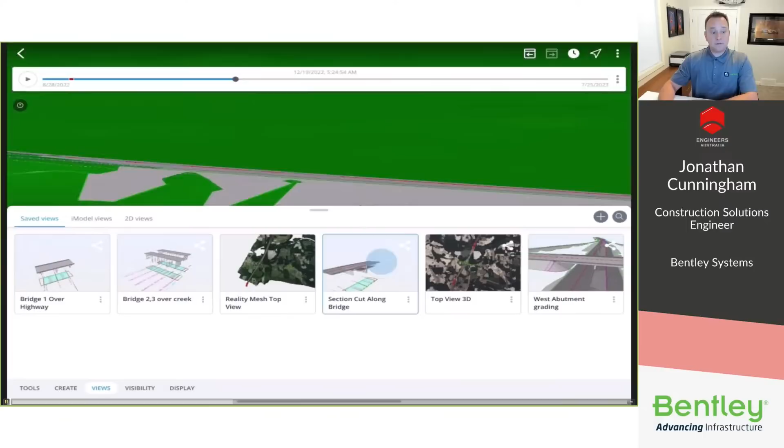Then you have that same sequenced playback of events that was created in Synchro 4D Pro, but can be viewed in the mobile format itself. We have different types of saved views that were created in the web and shared within the project itself. And then you can play back that same 4D sequence in those same saved views within the mobile itself.

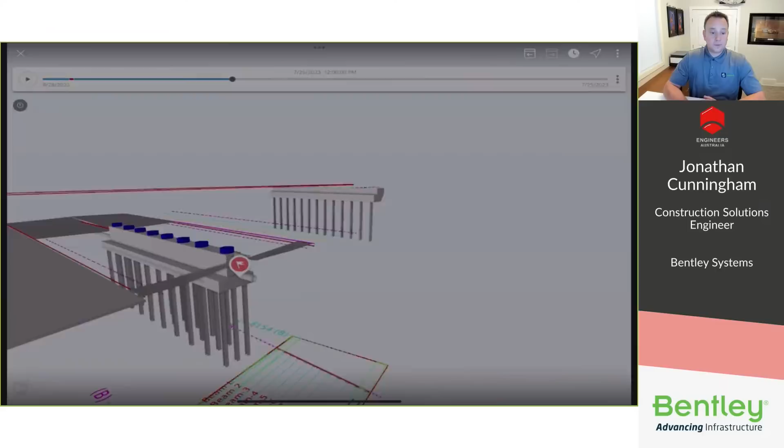Rolling back the sequence to see different aspects of it for installation, whether you want to put an issue, an RFI in, it really depends on what type of forms that you have in your project. So we're going to see how an issue is created, very similar to what we saw before with an RFI, but this would be the issue that was created against that storm sewer pipe. You can see we're going to assign it to a specific role.

Give it a due date. You have the map, the model location, as well as the other functionality of photos or documents that are within that mobile application. I can see comments. We're going to post a comment from the field itself, and then go back to the home page to see the actual overall sync within the project.